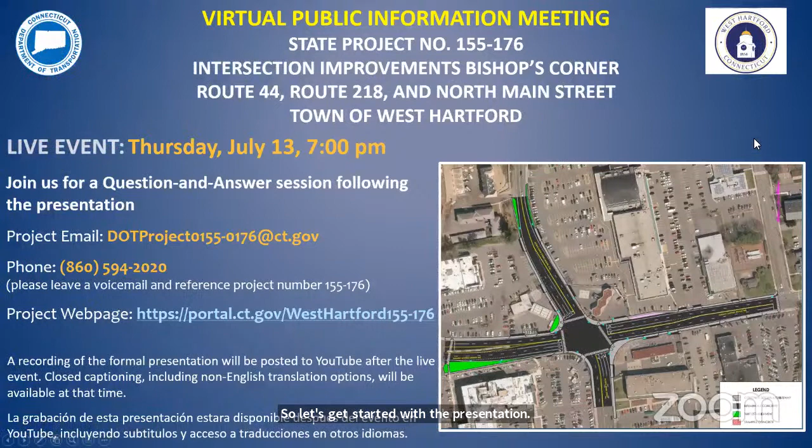On the agenda for tonight, I will run through the DOT representatives we have here. I'll go over more information on the meeting format. We'll go through some Title VI civil rights information, give a project overview, and discuss the existing and proposed conditions. Then go over rights-of-way information, as well as construction schedule and cost, and then conclude with the Q&A.

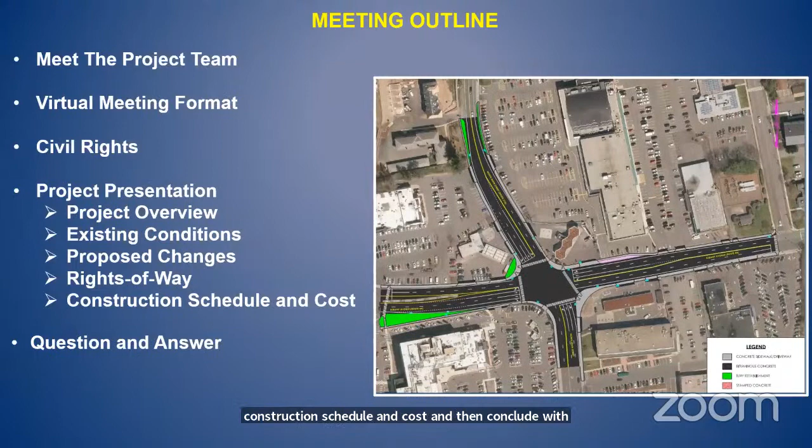With me this evening, we have Scott Bushy, the Highway Design Principal Engineer, Joe Arsenal, the project manager. My name is Andrew Esposito, I'm the project engineer. Tushar Gadi is the project designer. Colin Bomber is the traffic project manager. And Matt Giannakopoulos is our right-of-way coordinator.

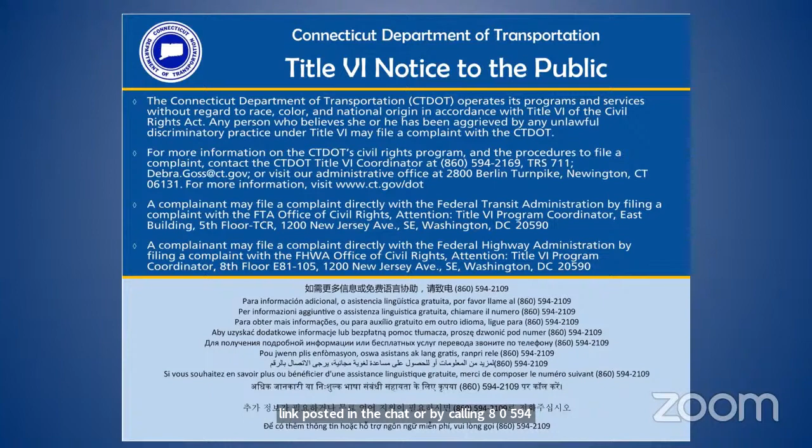This area is well developed with commercial and retail space. 3 of the 4 corners at this intersection have gas stations on them, depicted by the blue areas. And then we have the shopping centers and office buildings highlighted here in red, with all the parking spaces surrounding them. All legs of this intersection have a posted speed limit of 35 miles an hour.

Route 44 has an average daily traffic of 22,800 vehicles. Route 218 has an average daily traffic of 17,400 vehicles. And North Main Street, which is a local road, has an average daily traffic of 14,200 vehicles.

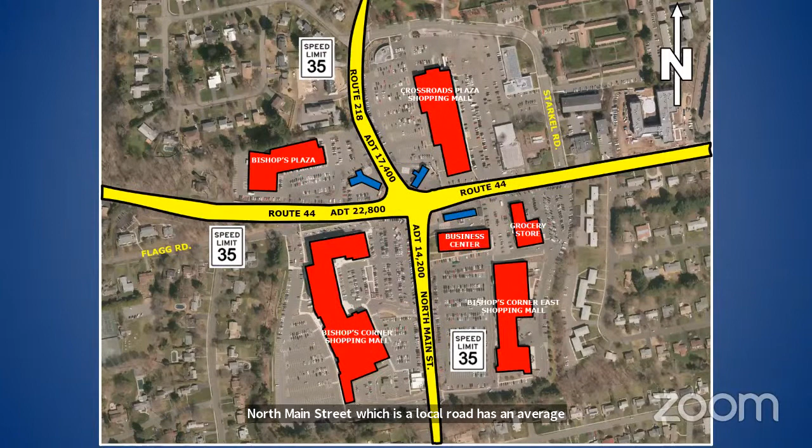This is the existing layout of the intersection. It's a 4-legged signalized intersection. There are 4 islands outlined in red. The traffic signal support poles are called out on the screen. 2 of the poles, the northwest and southeast poles, are located in the islands. All the pedestrian push buttons to activate the pedestrian crossing signal are also located within these islands.

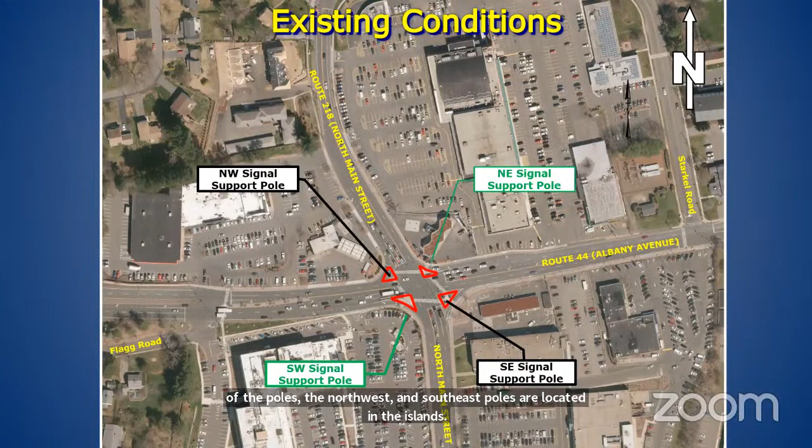All legs of the intersection currently have a left turn lane, represented by the orange arrows, 2 through lanes represented by the blue arrows, and channelized right turn lanes, which form the pedestrian islands, represented by the red arrows. The channelized right turn lanes are a big component of this project.

Drivers tend to focus on vehicles they need to yield to, which may leave pedestrians waiting to cross to the islands unnoticed.

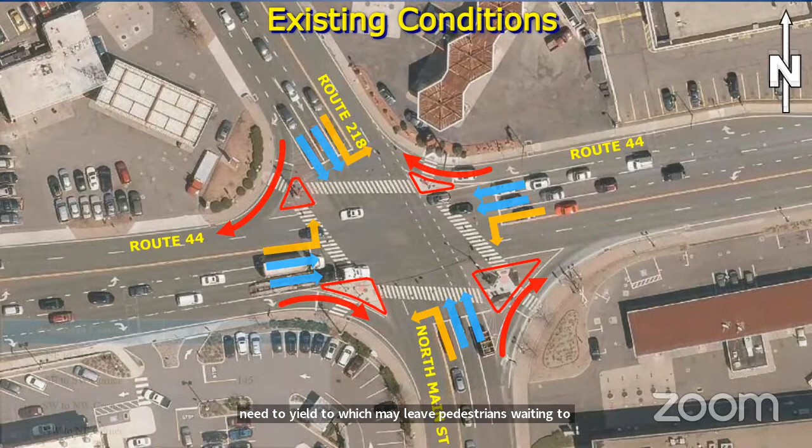There have been pedestrian-involved crashes recorded over the years, not only at the intersection crosswalks, but also at driveways and between intersections. We will continue to work with the town of West Hartford to investigate reducing these conflict points, and the aim of our design is to make the intersection operate more efficiently so that pedestrians don't find the need

to cross between intersections. The existing signal allows for actuated concurrent pedestrian phases with the through movements, which means pedestrians get the signal to cross the intersection in the same direction as the vehicles with the green light traveling through the intersection. However, as I mentioned earlier, all pedestrian push buttons are located in the islands.

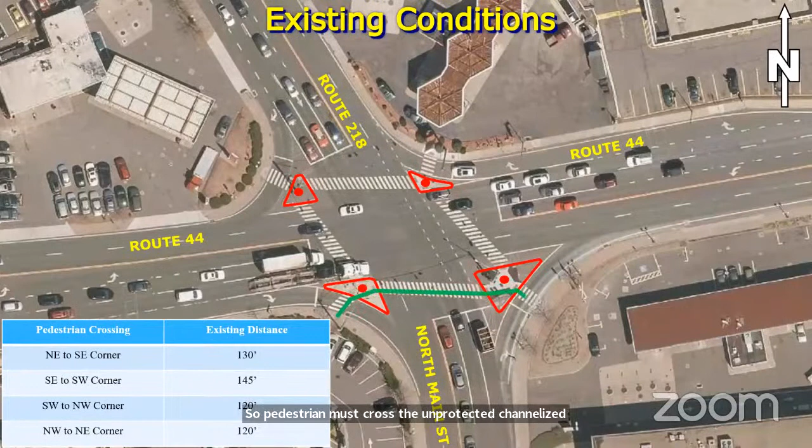So a pedestrian must cross the unprotected channelized right turn lane, push the button and wait on the island, and when they get the pedestrian signal, they can then cross to the other island where they need to cross another unprotected channelized right turn lane.

The Bishop's Corner Neighborhood Association and the town have received complaints from pedestrians who use the intersection, saying that crossing the intersection is difficult and confusing. They've complained that the crossings to the islands are unsignalized and motorists do not yield to pedestrians crossing the channelized right turn lanes, which Tushar and I have experienced firsthand during our field investigations.

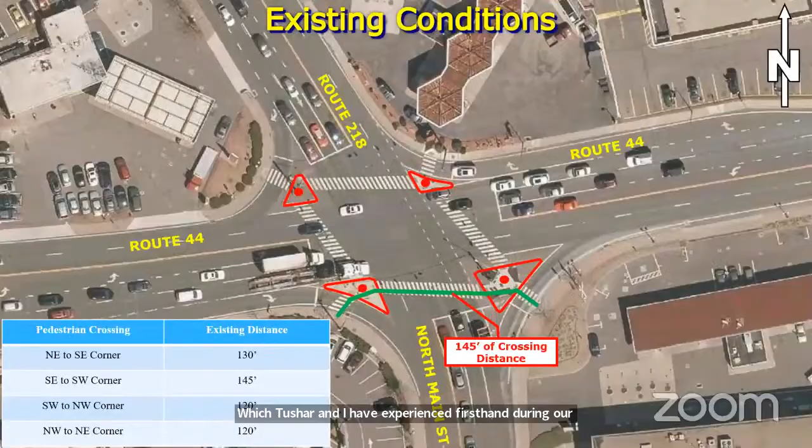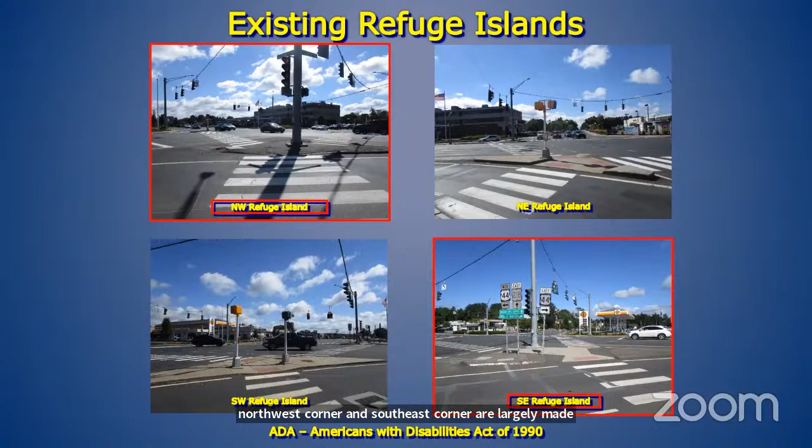They have also complained about islands being in rough shape. These are street level photos of each island in the intersection. As I said previously, pedestrians must wait in these islands for the signal to cross the roadway. This leaves them stranded between moving vehicles. The islands are small and crowded with signs and signal equipment. These islands are subject to vehicle hits when large trucks are turning. Some pedestrian ramps are not ADA compliant, and the 2 pictures outlined in red, the northwest corner and southeast corner, are largely made up of bituminous concrete, causing them to blend in with the surrounding roadway.

This is some background information on the initiation of this project. The project was assigned to the DOT's Project Development Unit after a safety audit was completed at the request of the town of West Hartford, and the audit aimed to highlight deficiencies at the intersection of Route 44 and North Main Street. The Project Development Unit met with the town of West Hartford and the Bishop's Corner Neighborhood Association several times between 2018 and 2019 to discuss alternatives that would address West Hartford's and the Bishop's Corner Neighborhood Association's concerns with the intersection.

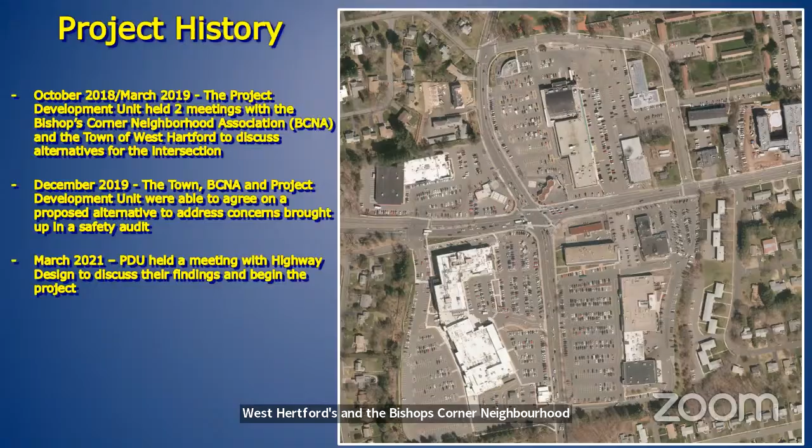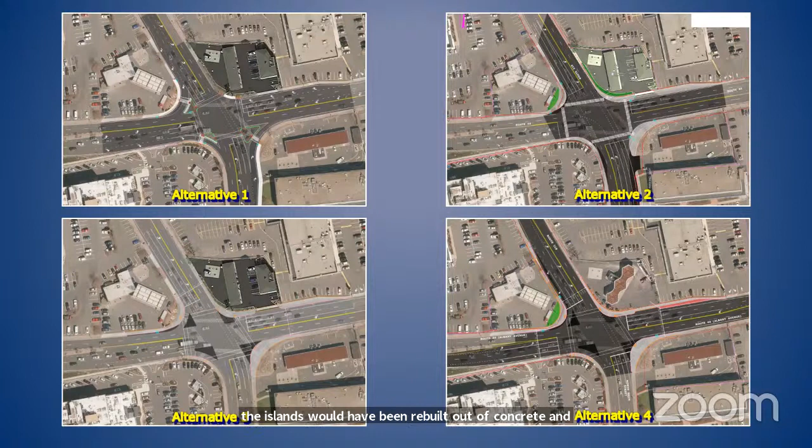These are some of the alternatives discussed. Alternative 1 was a minimalist approach where 3 of the islands would have been rebuilt out of concrete and signal equipment at the intersection would have been upgraded. However, it would still leave channelized right turn lanes, which would not be ideal for pedestrian mobility.

Alternative 2 removed all the pedestrian islands and implemented a second exclusive left turn lane on North Main Street, but was ultimately dismissed due to the high right-of-way costs and impacts to business parking spaces.

Alternative 3 also removed all the pedestrian islands and eliminated all exclusive right turn lanes, except for the right turn lane on Route 44 coming from Avon turning south onto North Main Street. This provided shorter crossing distances for pedestrians, but the reduction in lanes would result in worse vehicle congestion.

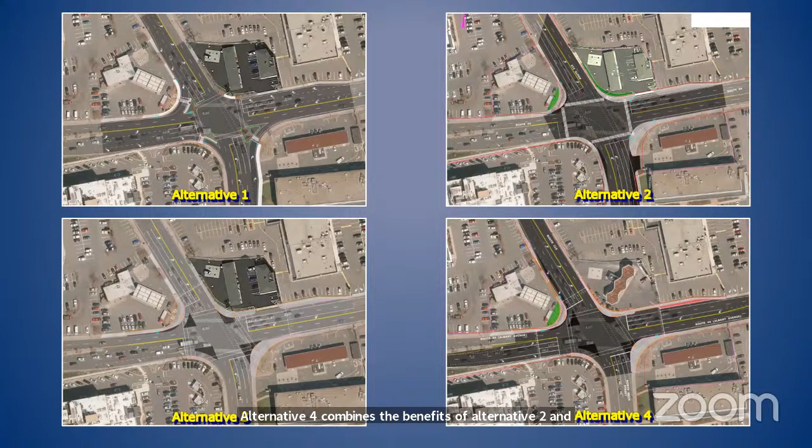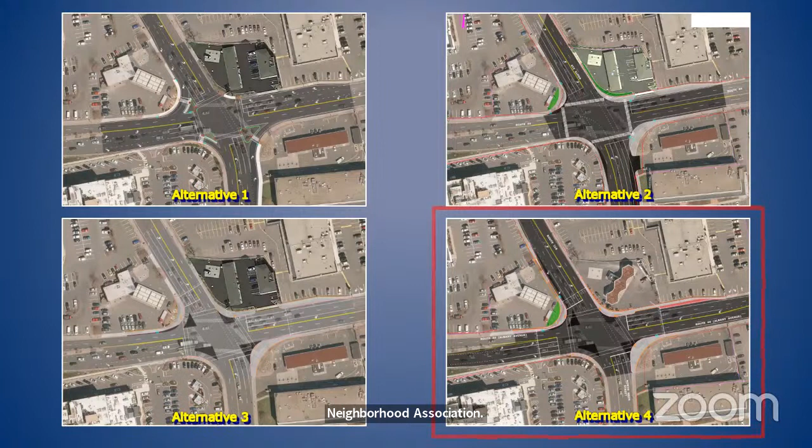Alternative 4 combines the benefits of Alternative 2 and 3 and was chosen as the preferred alternative by the DOT, the Town of West Hartford, and the Bishop's Corner Neighborhood Association. This concept was given to the Highway Design Unit and is what the preliminary design we are presenting to you tonight was based on. So now I'm going to hand it off to Tushar to talk about this proposed design.

Thanks, Andrew. Hello, everyone. My name is Tushar Gadi. I'm the project designer, and I'm going to go over the proposed changes. Based on the safety audit completed in the early stages of this project and concerns from the town of West Hartford, the goal of this design is to improve pedestrian mobility and overall operations at Bishop's Corner intersection.

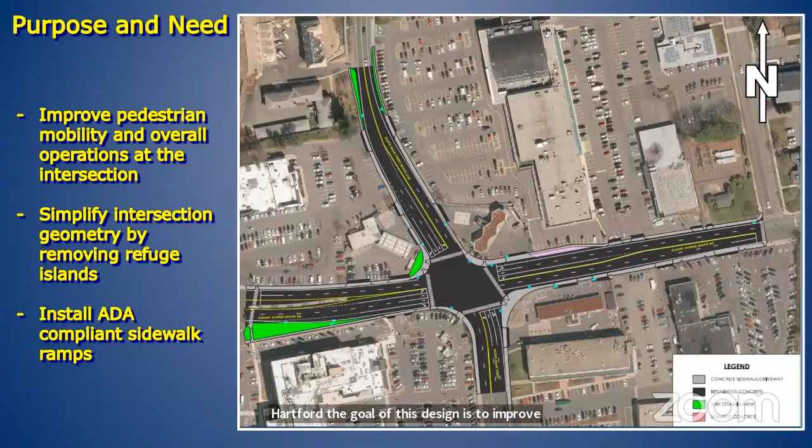This is an overall view of the project.

The project limit starts from the intersection of Route 44 at Route 218. It extends 450 feet to the north on Route 218, 650 feet to the east on Route 44 at Starkel Road, 250 feet to the south on North Main Street, and 500 feet to the west on Route 44 at Staples Driveway. The current project limits are subject to change to include other intersections as we approach the final design phase.

The project will be repaved throughout these limits. We'll be working with the town of West Hartford and our landscaping unit to determine the best treatment for the splitter island on the western leg of Route 44.

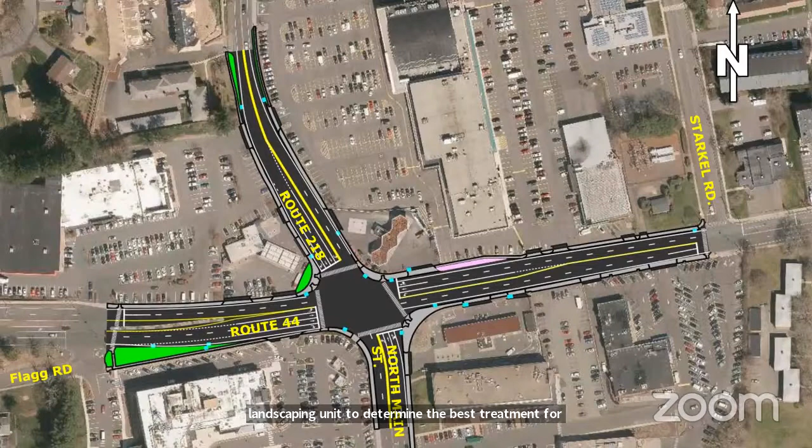The biggest change we're proposing is removing the 4 refuge islands in the center. This will have an impact on crosswalks and lane configuration. There will no longer be a channelized right turn lane at each leg.

For cars headed southbound on Route 218, the exclusive right turn lane turning into Route 44 towards Avon will remain. For cars headed eastbound on Route 44, the exclusive right turn lane will remain coming from Avon going to North Main Street.

For cars heading northbound on North Main Street, we're proposing to change the exclusive right turn lane to a combined through right turn lane.

For Route 44 westbound, we're currently proposing a combined through right lane, but we're still investigating the benefits of having the through right versus keeping the exclusive right turn lane.

We'll also be working with the town of West Hartford to reduce the cut-through traffic on Starkel Road.

New ADA-compliant sidewalk ramps will be installed to line up with the new crosswalks. We'll also be installing new traffic signals and new pedestrian signal equipment at the intersection.

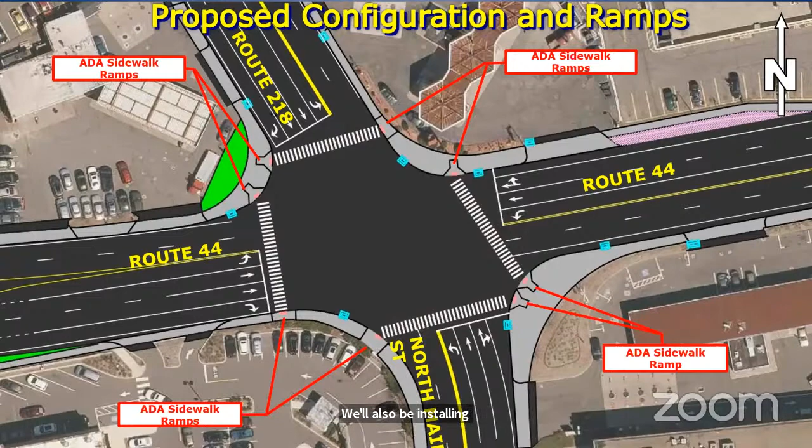For the proposed traffic signals, we'll be installing black mast arms similar to the decorative signal equipment located at other intersections in West Hartford.

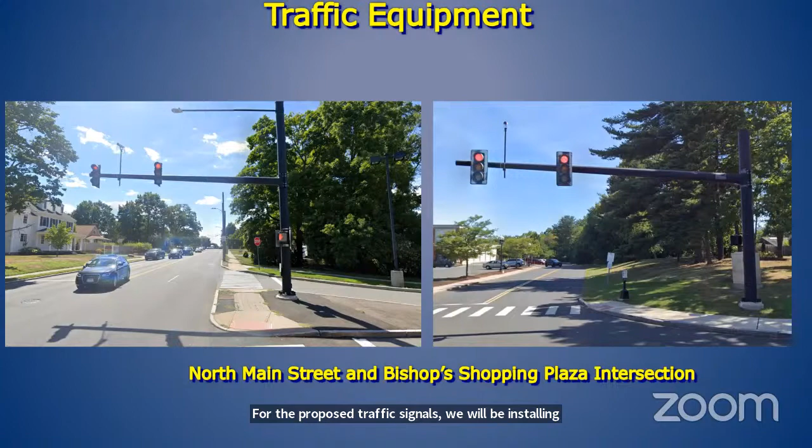With the refuge islands removed, we can simplify the crosswalks of this intersection for pedestrians. They no longer have to cross a channelized right turn lane to cross the street, and the distance they need to walk is much shorter than before. There's a 45-foot reduction on the east, 60-foot reduction on the south, 40-foot reduction on the west, and a 45-foot reduction on the north side.

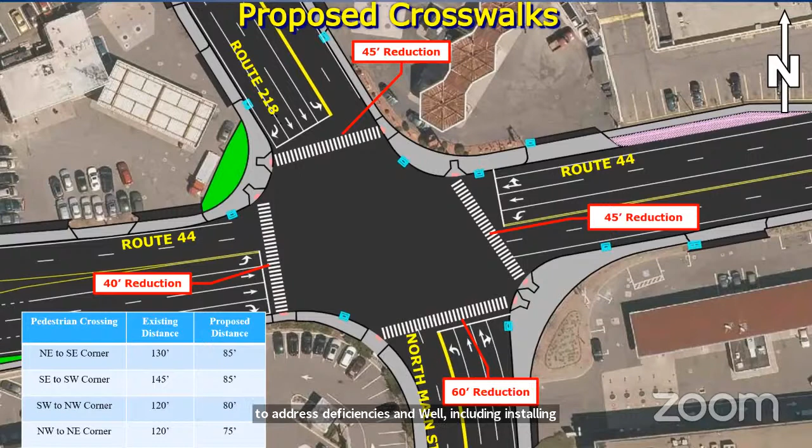The project is currently in its early stages of design, and we haven't begun the drainage analysis at this point. The proposed project will include upgrading the system to address deficiencies and will include installing new drainage pipes and catch basins to bring the system up to current standards to minimize flooding on the roadway.

We'll be re-implementing concurrent pedestrian phasing at this intersection. When cars going north and southbound on North Main Street and Route 218 get a green light, pedestrians are also allowed to cross the crosswalk in the direction shown in the orange arrows.

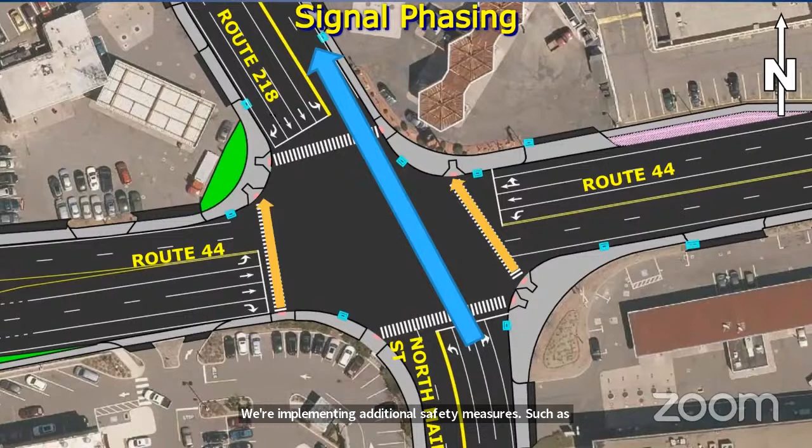We're implementing additional safety measures such as lead pedestrian interval, which gives pedestrians a 4-second head start to cross the intersection. We'll also be installing yield to pedestrian signs, shown on the screen here, for vehicles turning right onto Route 44 needing to yield to pedestrians.

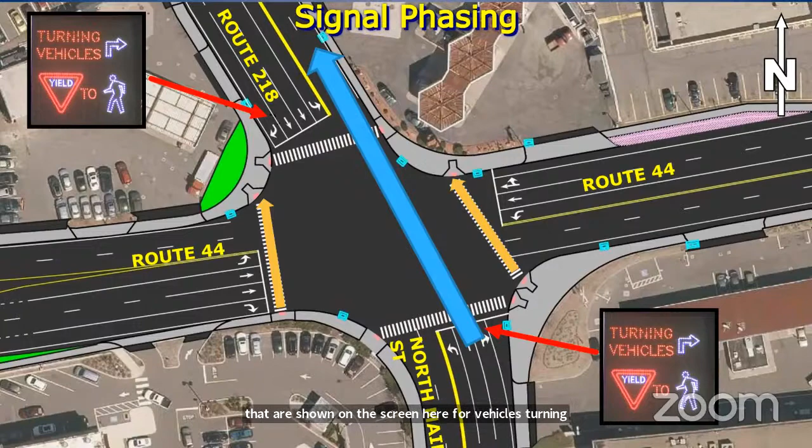Currently, we have no utility pole impacts. Underground utilities may be impacted by the drainage modifications, but this will not be known until we progress our drainage design.

During the construction of this project, we have no anticipated road closures, and business driveway access will be maintained throughout.

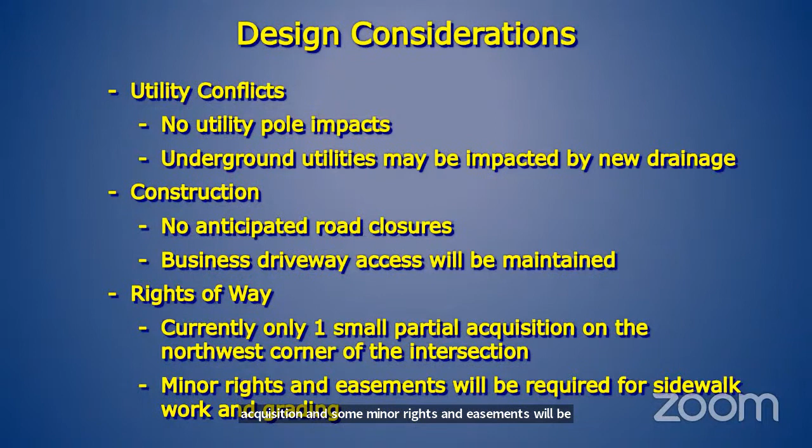We're currently anticipating one small partial land acquisition, and some minor rights and easements will be needed for sidewalk work and grading. And now I'm going to hand it off to Matt Giannakopoulos to talk more about rights-of-way.

I am Matt Giannakopoulos, and I am a right-of-way coordinator with the Department's Division of Rights-of-Way. It is our office's responsibility to acquire the property rights needed for transportation projects.

The proposed project design requires the acquisition of property rights, so I'd like to give a brief overview of the Department's right-of-way acquisition process. Please keep in mind that the specific impacts are still being fine-tuned and may change as the design progresses. Any property rights will be acquired in accordance with Connecticut General Statutes sections 13A-73 and 13A-98E. Whenever there is federal money used in any phase of a project, the department must adhere to the Uniform Relocation Assistance and Real Property Acquisition Policies Act of 1970, as amended.

Once the design has moved to the point where we are ready to begin the acquisition process, each affected property owner will receive a formal letter of intent to acquire from our office, along with a property map which depicts the exact property rights to be acquired.

At that point, our office will determine the fair market value of those property rights and use that value to establish an offer of just compensation.

The offer will be sent out to the owner in writing, and a right-of-way agent will be available to meet with the property owners, explain the project, go over the specific impacts to the property, and explain how the state developed its offer.

The property owner will have a reasonable time to consider the state's offer and enter into negotiations. If an agreement is reached, the state will prepare all the necessary paperwork and record the deed and the property map on the town land records.

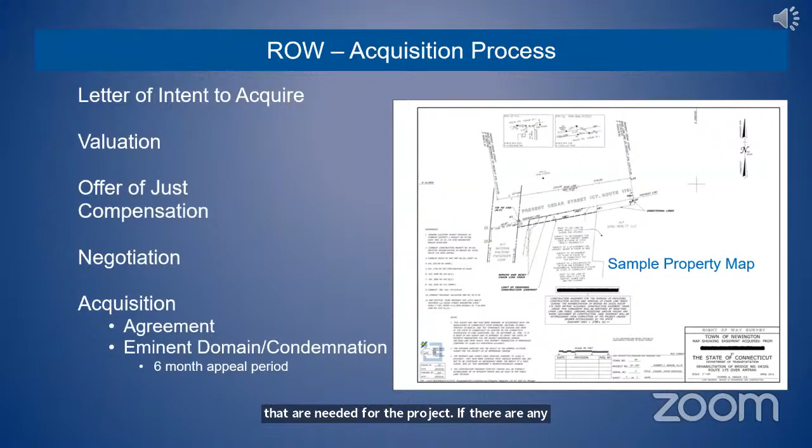If there are any questions regarding the department's right-of-way acquisition process, I'd be happy to address them during the Q&A portion of tonight's meeting.

Thanks, Matt. Now we're going to finish it off with schedule and cost. We have design approval on August 23rd of this year. The design completion date is in January of 2025, and the notice to proceed is in July of 2025. We expect the construction to last approximately 18 months, and the estimated construction cost is approximately $5.5 million.

So that's the end of the presentation, and I am going to pass it over to Joe to start the Q&A session. Thank you.

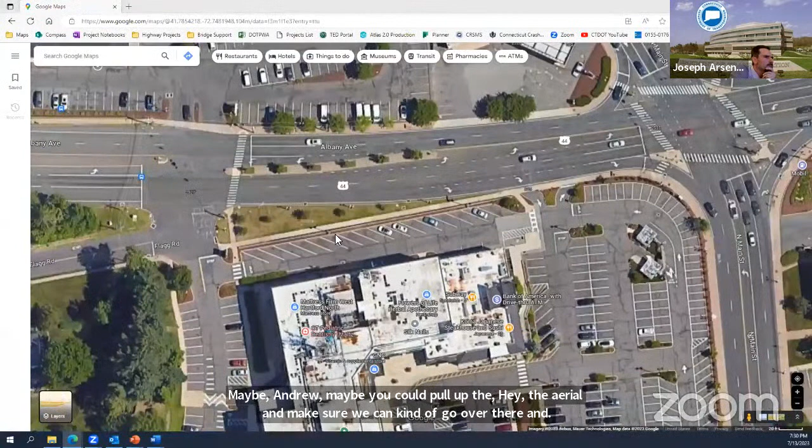Maybe Andrew, could you pull up the aerial and make sure we can go over there and zoom in on that location. So we're looking at this intersection over here, or... yeah, correct. So the question was, we're looking to give priority for pedestrians on the crosswalk because Sims Road out of McDonald's parking lot. That's certainly something we can look at. I'm not sure priority over what—they'll have an actuated phase for sure.

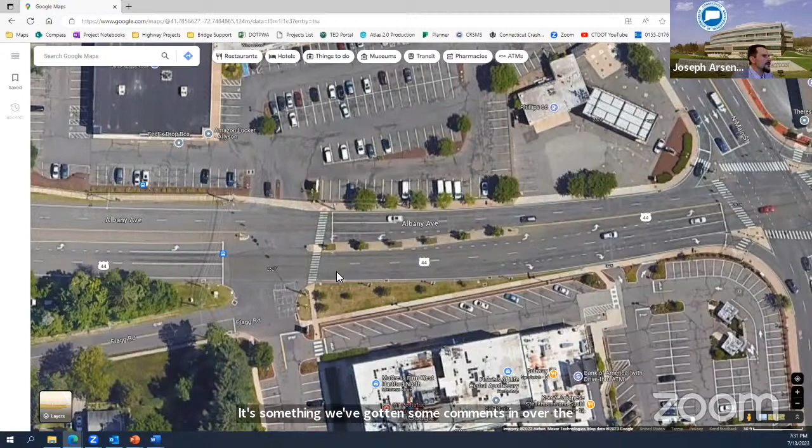And we can take a closer look at those pedestrian movements. Yeah, and maybe the individual here is speaking to providing a leading pedestrian interval, getting them out of the intersection first. Up to this point, we haven't really included a full investigation at that intersection. It's something we've gotten some comments on over the past few days, and we've started to have some conversations internally about. So we're going to have discussions with our team and management, and also with the town, to see what opportunities we have over there to make things flow better traffic-wise, and also for the pedestrians. It is kind of a funky configuration there with Flagg Road coming in so close to 44, and then Sims Road right there, with limited area to store vehicles at that light. It's something we're going to be looking into moving forward, and certainly we'll be considering upgrading the pedestrian amenities in that area as well.

Now, the next question we have is: why is the state not using a no-right-turn-on-walk-light option instead of a yield option?

I'm going to see if Colin could chime in on this—Colin is our traffic engineer, he might be able to provide some insight. Good evening everyone, Colin Bomber. So yeah, I think the question is about the no-yield-to-peds issue, and that's our state statute in Connecticut. You'll see all our signs at various crosswalks that say drivers must yield to pedestrians, and that's how our state statute's written. Other states are written differently, where they say vehicles must stop for pedestrians. I think that's where that question's coming from.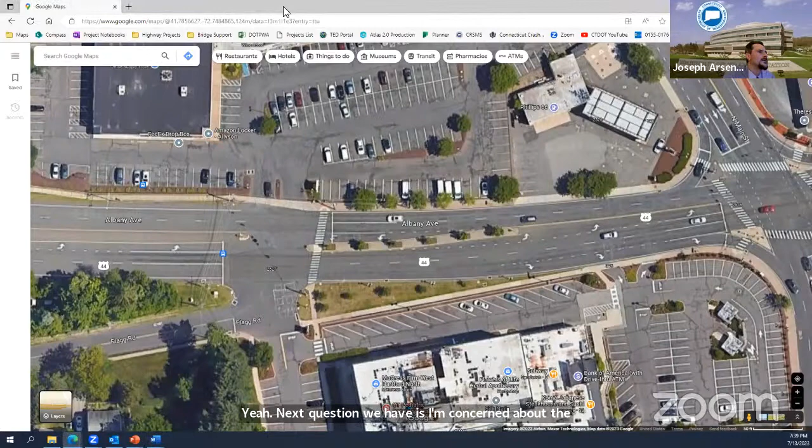The next question: I'm concerned about the removal of the right-hand turn from North Main to Albany Ave. Why is this being removed? Maybe Andrew, you could pull up that zoomed-in image of our intersection — the proposed one.

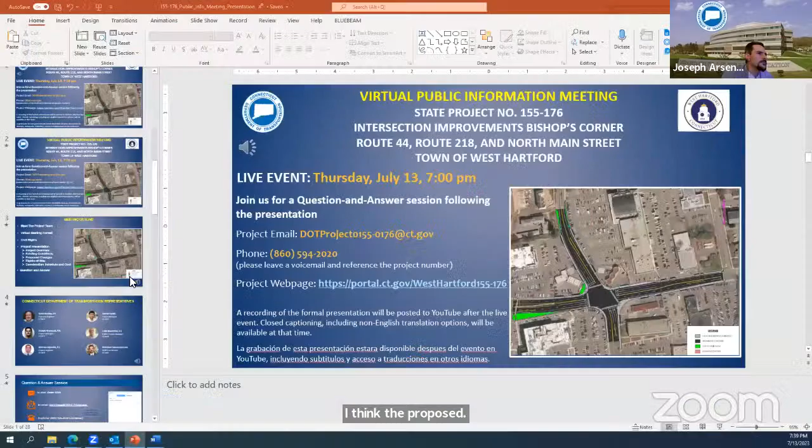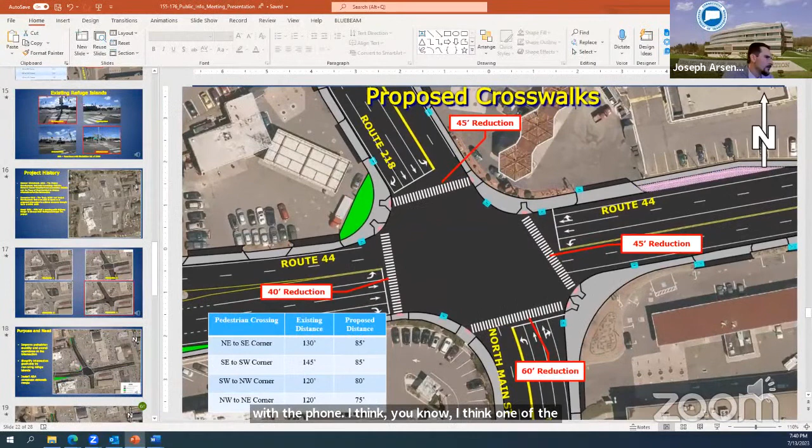We might have to go back between existing and proposed. I'm not sure if we can do that on here, but right now today we're talking about the southern leg of the intersection, traveling northbound on North Main Street taking that right. Right now, there really isn't much of a right turn storage lane, it kind of peels off quickly into that channelized right turn.

And it doesn't really have the storage and effect of a proper right turn lane. Maybe Colin could speak a bit more to traffic volumes in that area. Yeah, the number of right turns for the northbound movement was on the lower end, while the Route 44 eastbound right turn onto North Main Street was much heavier. So that's one of the reasons why the team felt we needed to keep that right turn lane.

So just to clarify, we'll still keep the ability to turn right, it's just the turn lane that is proposed to be removed at the moment where the project's at. A lot of times when there's only one or two vehicles in that through lane today, access to the current channelized turn lane is blocked, so it's not functioning as well as the other ones at the intersection. That all plays a part of that decision.

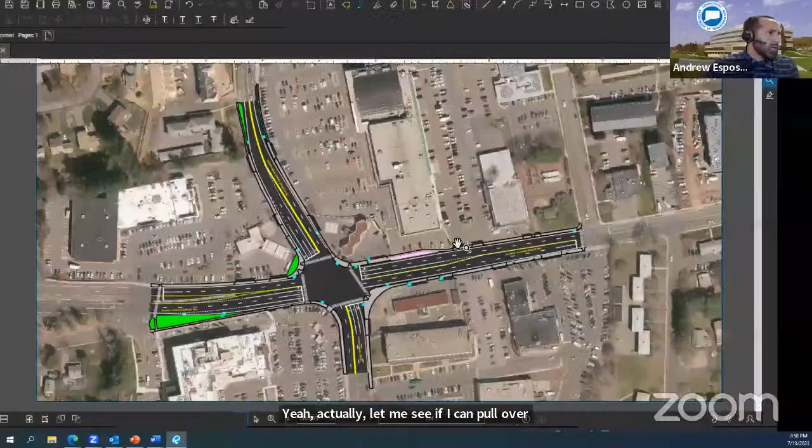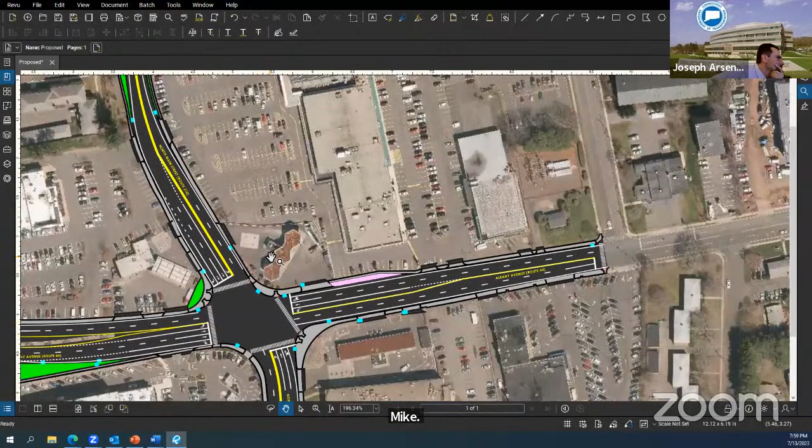Yeah, let me pull up a PDF of that. So I believe we're talking through here and around the corner. Once they're around the corner, those two lanes merge into one right at the intersection, right at the driveway for Big Y. I think they're wondering if we could extend that right lane and make it a dedicated turn into the parking lot there. Our road width does get choked down a little bit up by that driveway, that might be one of the constraints there.

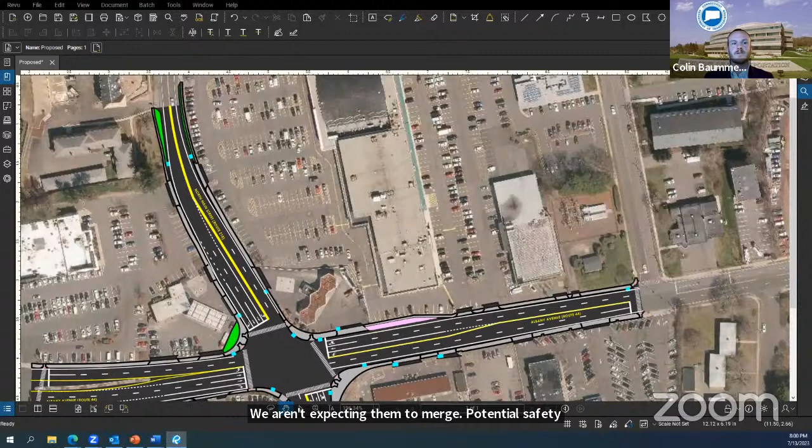Colin, do you have any thoughts on if that's something we could pursue or look at? Yeah, that's something we could consider. It's a little tough because sometimes when you do that, we call it a lane trap - people end up in that lane when they don't want to turn into the Big Y or the gas station, then they have to merge in, but the rest of the through vehicles in the other lane aren't expecting them to merge. So it's a potential safety concern, but it's something we can look into further. I think today it kind of operates that way already, with a lot of people using it as a turning lane into the Big Y plaza, so it's something we can take a look at a little more.

Yeah, that sounds good, thanks Colin. Yeah, it's definitely worth a second look, and we appreciate the comment.

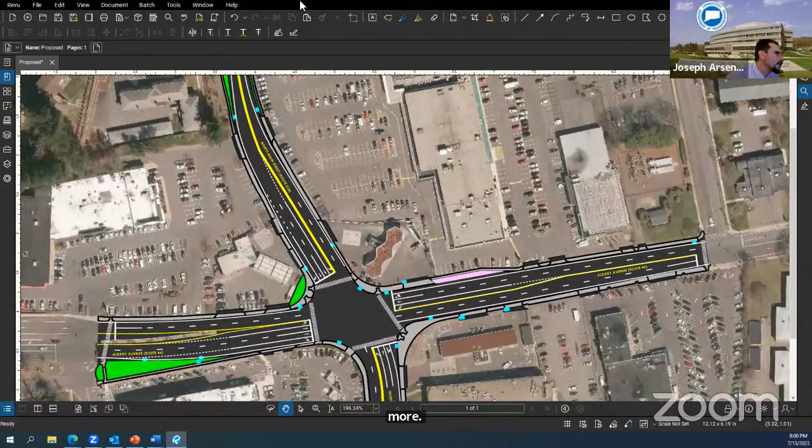Our next question: will the lights cycle automatically 24/7, or will there be priority for Route 44 green light if no one is waiting at the intersection coming off North Main Street? Colin, any thoughts on that? So during a late night time period when traffic volume is a lot lower, the signal would stay green for Route 44 until any pedestrians or vehicles pull up to the North Main Street approaches. So that answers the question - it would stay green for Route 44.

Another question, comment from Stephanie. She says: please do not leave bicycles out of the project here, and even more pertinent, please do not think that painted lines will achieve anything. By the way, feeling more comfortable about biking is not the goal - it is the actual reality of being better protected. This is not a mental health issue, it is a public health one. Thanks for the comment, Stephanie. We definitely want to engage with you and the bike groups moving forward, so we appreciate your involvement and look forward to the ongoing coordination.

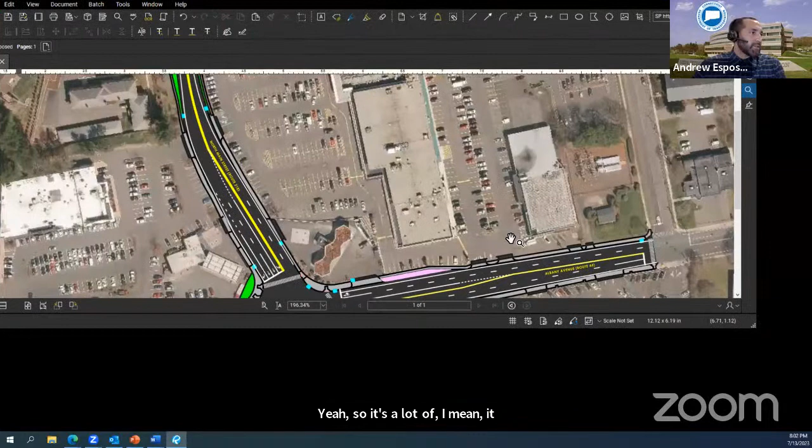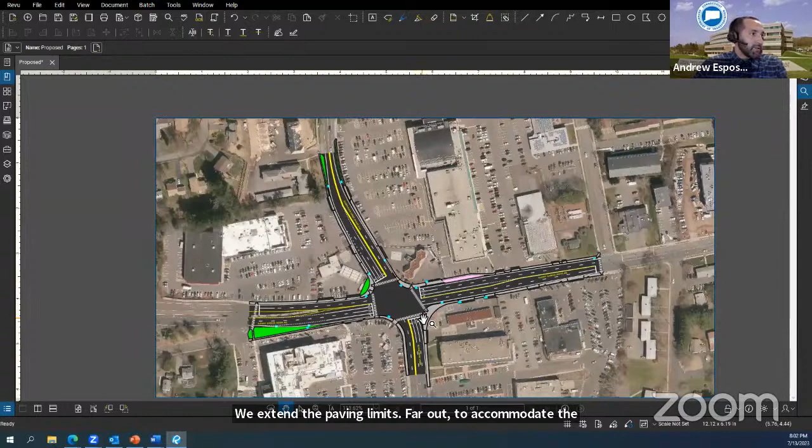The next question: why is the cost over $5 million for what appears to be minor improvements? Andrew, maybe you could speak to how the cost works on a project like this. Yeah, it may not look like it in the zoomed-in picture, but if we zoom out it's a decent sized intersection. We extend the paving limits far out to accommodate the new lane arrangements, and paving is expensive. We have plenty of drainage work in the intersection that needs to be reconfigured as part of the new geometry, and there's anticipated underground utility work in there.

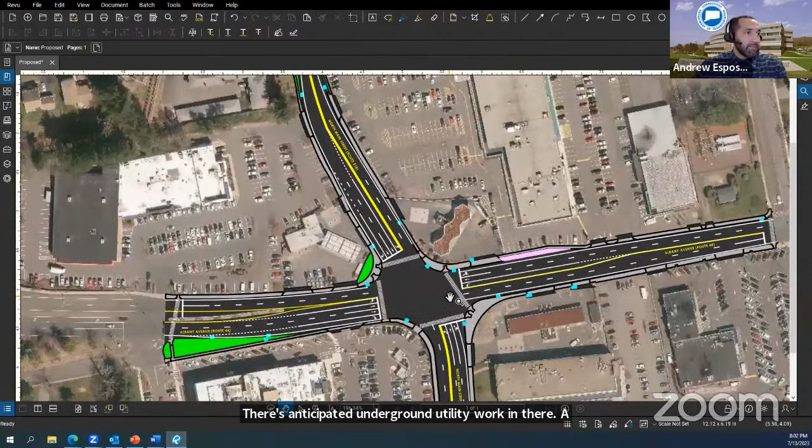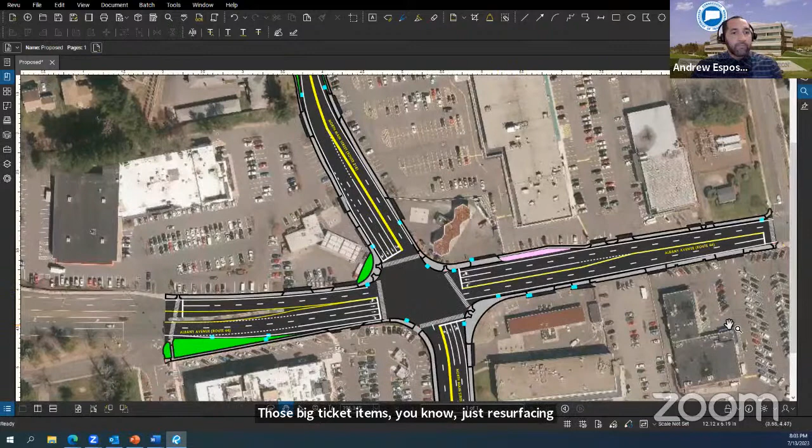Traffic signal equipment can be expensive. It's a preliminary estimate as we fine tune the extent of the project. That's kind of how we come up with that number. We're redoing a lot of the sidewalk in this area, so all that put together is how we landed on that. Those big ticket items, resurfacing the entire area, the costs add up. But this is not a high number for an intersection job like this.

Great, thanks. All right, the next question we have here is from Sarah. She's asked, would the state and town consider eliminating the ability of cars to turn left at North Main mid-block, and eliminate the ability of cars to go straight across mid-block, Whole Foods to Marshall's block?

Dangerous. So Sarah, I'm guessing you're talking about vehicles entering and exiting some of the parking lots, including Whole Foods and Marshalls, as you indicate. We've definitely heard many concerns about the numerous access points out here. We could certainly have those conversations with the town and discuss any opportunities for cleaning up or minimizing movements and conflict points at some of these driveways. Thanks.

Got another question here. An anonymous attendee says, do you foresee additional traffic on Starkel Road with motorists trying to avoid the entire intersection? And if so, will additional accommodations be made for the older residents in that area?

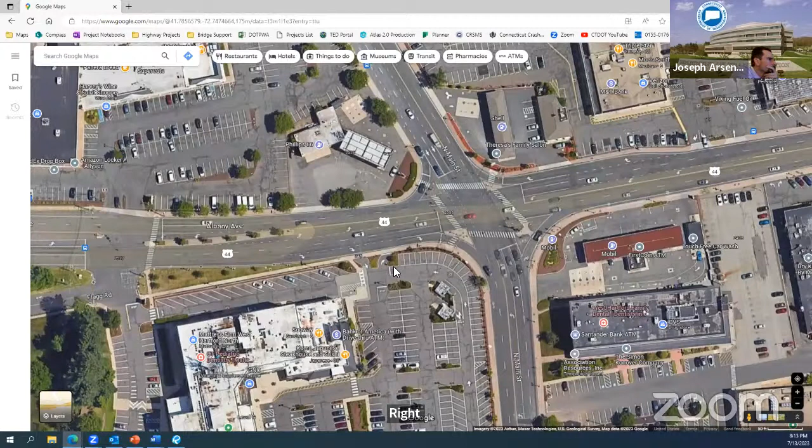Just wondering if maybe you get trapped in that right turn lane, because where that driveway exits, you almost have to get into that lane. It'd be tough to move over to the left turn lane. Right, yeah, so that's something we can look at, but that does look like it would be a tough move to get to the left turn lane, maybe is what he's trying to say. Unfortunately it adds more length, but the good thing is you have the ability to keep circulating through the parking lot and take a longer route to get there—so it adds time to your trip, but it might be an easier movement. I'm sure we could take a look if there's anything else we could do under this project to help get people out of that driveway next to the Bank of America.

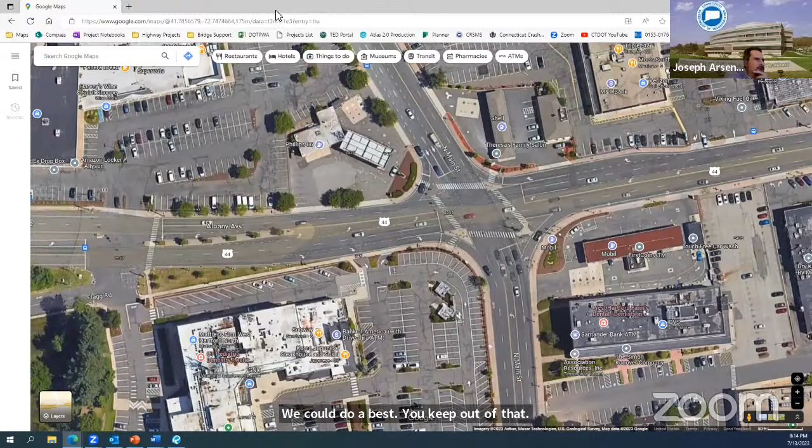Next question: has the state reviewed technology to illuminate the crosswalk when a pedestrian crossing button is pressed? This could provide additional safety as drivers would know someone is in the crosswalk. I'm not familiar with us as a state doing any kind of illuminated pavement yet. Is that something we're looking at, Alan? Is that an option?

Not currently. Years ago we had some pilots of that, and unfortunately the technology wasn't there with what we had at the time, and then our snowplow and salt operations in the winter meant the in-roadway lighting didn't last very long. But pedestrian safety is one of the things we keep looking into, so I wouldn't be surprised if someday in the future we get there. It's a fight we have in some of the other northern states, since snowplowing and salt make it tough to put stuff in the pavement for better illumination.

Next comment: the law about pedestrians in the crosswalk is that you yield to pedestrians in the crosswalk. Pedestrians should be educated not to enter the crosswalk if it means a car must stop. Pedestrians should be responsibly safe for themselves.

Thanks for the comment, Suzanne. Unfortunately, it's difficult to educate the entire public and everyone using this area, so we just try to implement whatever we can to make it a safe environment for everyone.

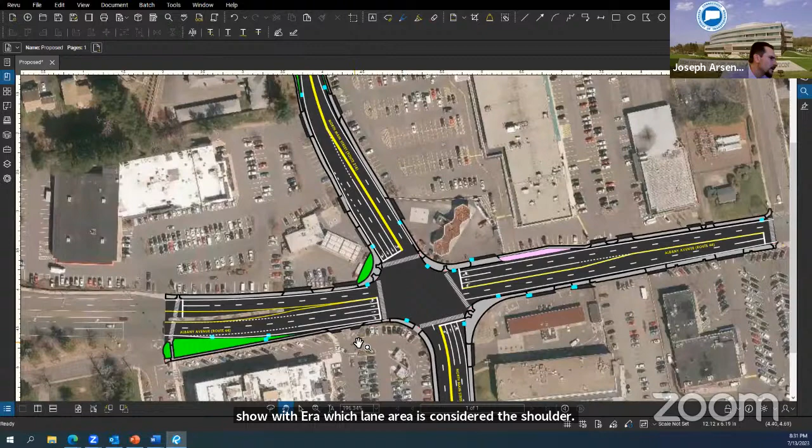Well, it's cut off here a little, but there you go. So I think in this area, this is one of the areas where the shoulder is pretty tight right now due to our travel lane widths.

There's minor shoulder width improvements here, but like I said, the roadway width approaching that intersection does get pretty narrow.

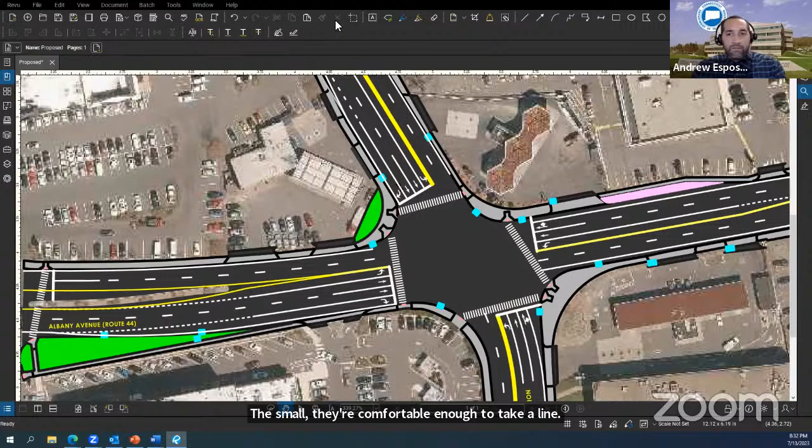Next question we have is, if it were decided to keep the refuge islands instead of the plan being presented tonight, would it be feasible to bring them up to code?

Andrew, maybe you could speak to that a little. We don't really have a specific code for islands. We do have some standards we follow for curbing and ramps and stuff like that. We'd want to make sure we'd be able to fit ADA compliant pedestrian ramps and all the new pedestrian signal equipment. To do that, we'd be increasing the island size, which would also complicate lane configurations, and it would also still make it difficult for pedestrians to cross at the same time. So I think that's why that option was eliminated early on, because to fit all that in, you do kind of have to beef them up, and that still makes the lane arrangements hard.

Yeah, I think that makes sense.

All right, we have one more question here from Jeff, going back to his comment earlier about the overhead warning signs, saying maybe we could do painted on road signs near Sims Road, since people coming down the hill from the west on 44 are probably going faster than the speed limit, which is why West Hartford PD parks on the block just west of Staples, so drivers need more time to get in the correct lane. Yeah, that might be another option, something we could look into, if we could add some markings to the lanes to alert people ahead of time to get in the correct lane.